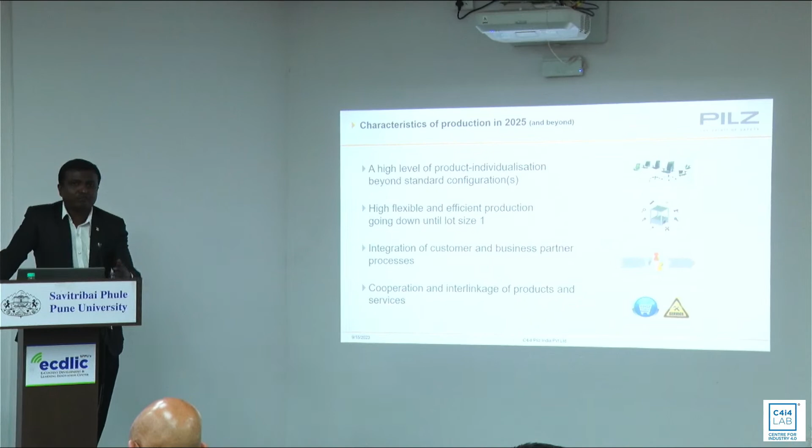If there is a failure or changes you need in one machine, you only need to configure the decentralized part, in a laser marking equipment, for example. And only that unit needs to be certified rather than going with complete system certification.

Of course, integration plays a very important role. So we are integrating not just machinery but our network and office systems also. For example, say a production-related system, ERP system, SAP. If that also wants to be integrated, and if you want to manufacture parts on a lot basis or a single part, then that has to be done in a decentralized way.

So in this case, a lot of tools and a lot of products will be required to be interlinked, and that has to be adopted and controlled in a coordinated manner, considering safety and security aspects as well. Just imagine you have plant machinery operating, 1,000 parts are being generated, and suddenly due to some cyber attack or cyber security related threat, you are not able to run your machine. Example, ransomware attacks.

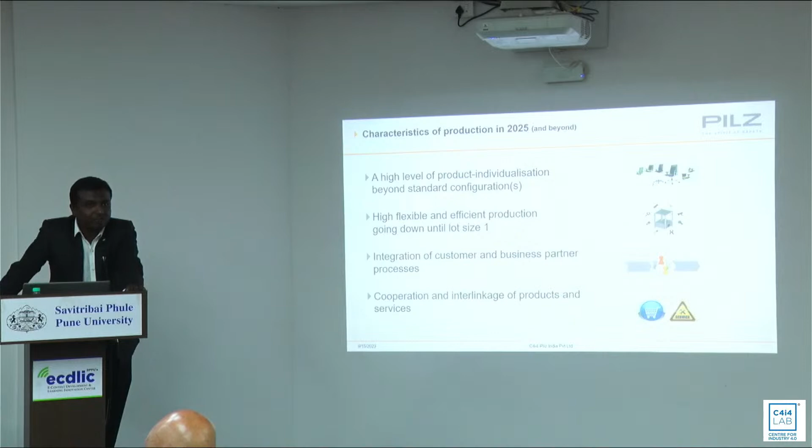Nowadays it is very common. You may have heard it many times in the news. If a ransomware attack happens, what happens? You are not able to run your equipment unless you pay some amount. It means virtually your production is at a standstill. And hence, considering all those threat aspects, when we are integrating things into the machinery like cloud technology, IIoT, industrial networking, security plays a very important role.

So in this case, the products which we are going to use can themselves generate a lot of information. For example, if some person wants to access the machine, the first thing you need to check is whether he is really an authorized person or not. In many machines you see auto mode, manual mode, setting mode, different types of operating modes. But do you know who is operating these modes? Are they really authorized to do this activity, or can any person access these operating modes of the machinery?

So in this case, authorization plays a very important role, and instead of conventional mode selection, you have to go with some standard or safety product wherein security is also guaranteed. It means the data of the person who has access to the machine is also captured by that product itself. Maybe the person's name or their authorization, but apart from this, security level, permission level, maybe some unique code like a hex code or RFID code, will make sure that the person is correct and authorized to carry out certain actions on the machine.

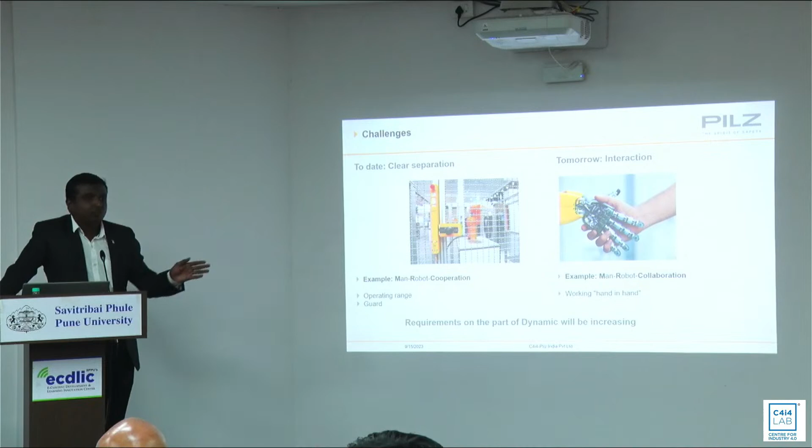So just as a concept, in a traditional way, we use guarding, interlocking switches to make sure that people are safe from unwanted or unauthorized access. Whereas in collaborative operation, man and machinery will work in the same area at the same time, and hence there is a requirement of risk analysis. Whenever there is a possibility of hazard or incident, we should do proper risk analysis.

So there is always a dedicated standard available. For the risk assessment, what is the standard? ISO 12100, specifically with respect to the machinery. This ISO 12100 standard talks about how you can do the analysis and estimation of different hazardous scenarios into the machinery. There are certain steps we need to follow - as a first step you need to identify limits of the machinery.

It may be user limits, specification limits, different energy sources which you connect into the machine - electric, pneumatic, hydraulic, chemical, water - different types of energy sources are there. That source itself can lead to an incident sometimes if they are not controlled in a safer way.

Then hazard identification. Simple - nowadays robots or AGVs are being used frequently in the plants. If a robot is there, what are the different types of hazards associated with robots? Simple - impact hazard. If you have access to the robot while it is in motion, impact is possible. Crushing hazard - clamping of tools or clamping of fingers due to the end effector. So all those hazards, whether mechanical, electrical, or control system, have to be analyzed properly.

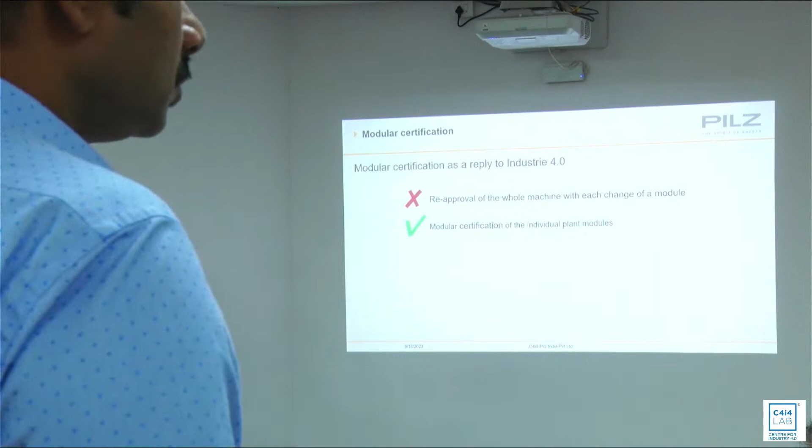So now, related to security, the standard IEC 62443, this is the series which is more common in use whenever cyber security related aspects need to be checked. There are multiple standards in this series, but IEC 62443-3-3 is the more visible standard globally. This is the standard which gives information about security level and foundation requirements.

There are 4 security levels, SL 1, 2, 3 and 4. There are again 7 foundation requirements for the networking aspect. Foundation requirement 1 is related to identification and authentication control—who is accessing the machinery or equipment. Foundation requirement 2 is related to use control—how, in a modular way, user control will be applicable.

Then the third requirement is system integrity. Fourth is data confidentiality, which is very important. Then fifth requirement is restricted data flow. Sixth is timely response to malfunction or events. And the 7th foundation requirement is related to resource availability.

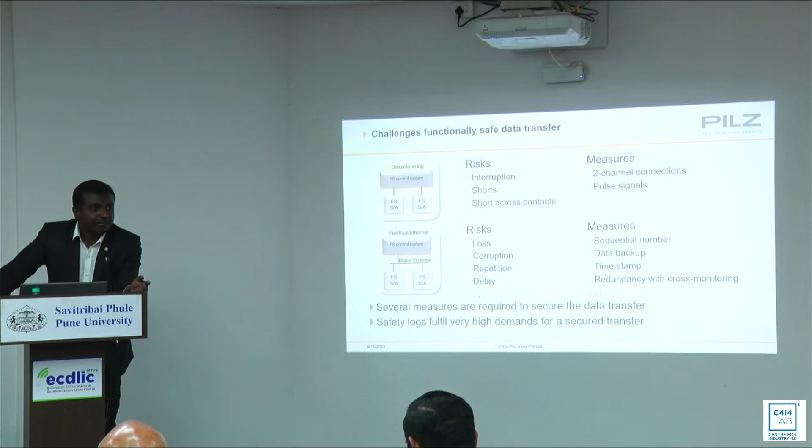But it will not allow us to compromise our network in any way. We have to maintain that security level even if there is a failure aspect. So if there is a corruption in the data or loss of data, by using certain protocols, those data breaches can be detected and certain actions can be taken. So in this case, multiple protocols may need to be used.

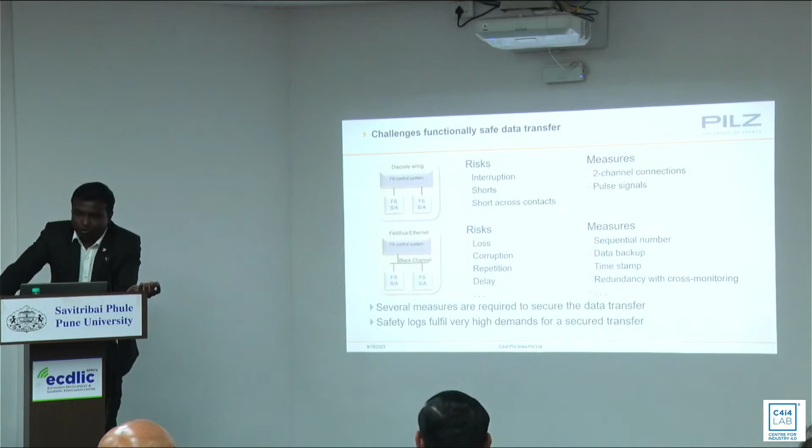As of now, most of the systems are fixed. There is a system, there is PLCs, there is SCADA, there is a PC terminal. But in tomorrow's Industry 4.0, typically you may need to use some AI algorithms, ML, cloud system. Whether it's AWS or Azure, data storage mostly will be done on the cloud, and based on this, access level will be given.

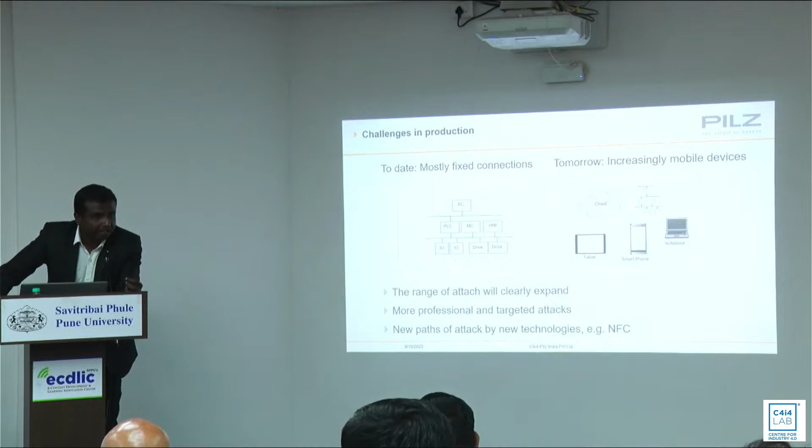So it is no longer a fixed connection. These are remote connected. You can have information just on the click of your buttons or fingers. And hence when we are implementing these solutions, please think of the standards compliance needed with respect to the networking. If you do the risk analysis or security level analysis of the network, there will be high possibility that there is no chance of any security related threat to your systems.

Now in this case, there are multiple levels: components at the factory level, network level, and all your communication or network related equipment at the factory level. So the interface with respect to all these levels has to be secured. It may be intranet, it may be internet, there may be different types of communication methodologies used within the plant or outside the plant. All that access control has to be secured by some mechanisms, and hence we have to make sure that whether it's a fixed installation or some dynamic situation with dynamic machineries, in all cases safety will be maintained.

Now these are the foundation requirements which we talk about. So we have to take care about data integrity, data confidentiality. In some countries it is already implemented and it is expected to be implemented in India as well. How the data will be managed, resource availability, identification and authentication control, IAC - that plays the most important role.

Nowadays some hardware or unique keys are being used in equipment to make sure that unauthorized access will be prevented. But as per Industry 4.0, it will not give enough data like who is accessing these keys, and hence you may need to use some RFID keys which give a lot of information about security level, permission level, who the person is, their hex code or some unique coding by which the person will be authenticated and known. So these are some foundation requirements over which networking security will rely.

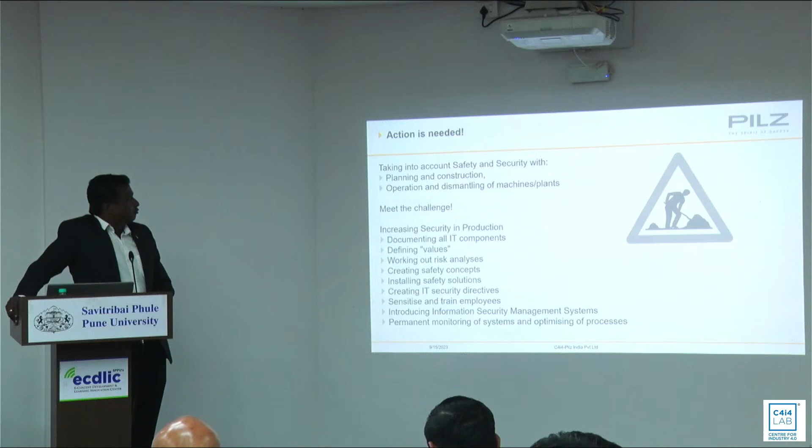So while taking into account safety and security, planning of networking plays an important role. Also, the type of equipment and devices used in the machinery and what type of connectivity they have play an important role. So in this case, there is a huge requirement to meet the security challenges: documentation related to all IT related components, risk analysis of all equipment, creating the IT infrastructure, creating IT security related directives. From that, your analysis will start. And then only with the help of trainings, actual implementation and learnings, you will be able to know what the actual risks in your system are.

So just as a summary, safety and security are two sides of the same coin. Safety plays an important role as well as security in machine automation. Based on the demands of the machinery, the solution can be complex, or sometimes an easier solution can also work. The best way to make sure that you have a system which is meeting the requirements of the standards or directives is to use the recommended IEC or ISO standards, so that you will also know that the compliance level for your equipment or network is achieved properly.

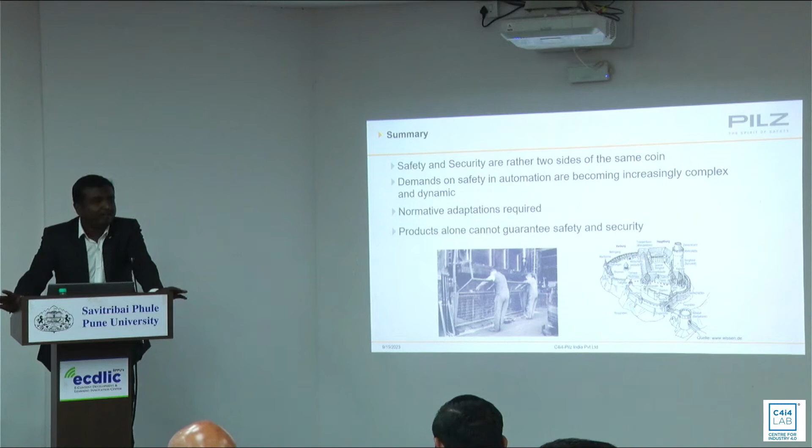With this, I will just play one small video which is a smart factory concept. This is one Industry 4.0 concept developed. So there is a machine available. It's a complete

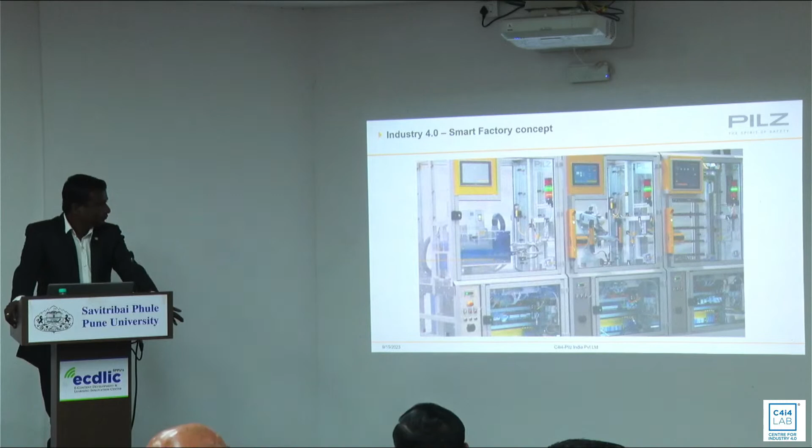Smart Factory from Pilz. Here, pens and business card cases are individually engraved. The Smart Factory is composed of 3 modules which are networked together and can operate independently of each other. Once the engraving data has been entered into the computer and sent to the Smart Factory, production in accordance with Industrie 4.0 begins. An RFID chip on the workpiece carrier contains all the data relevant for the process. So the robot in the second module knows whether it needs to remove a pen or a business card case.

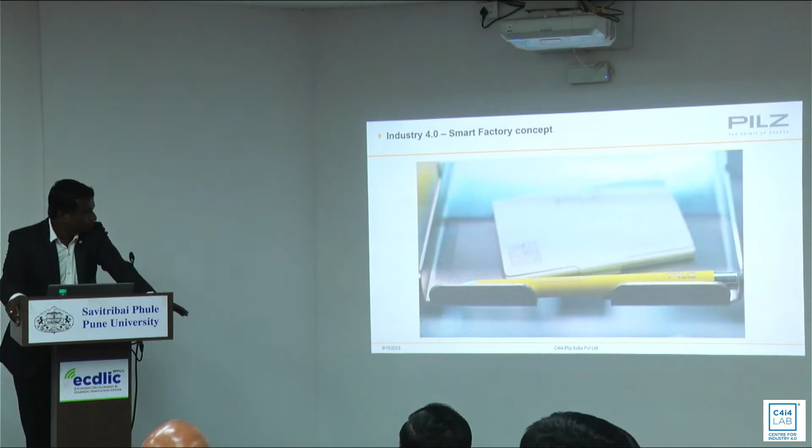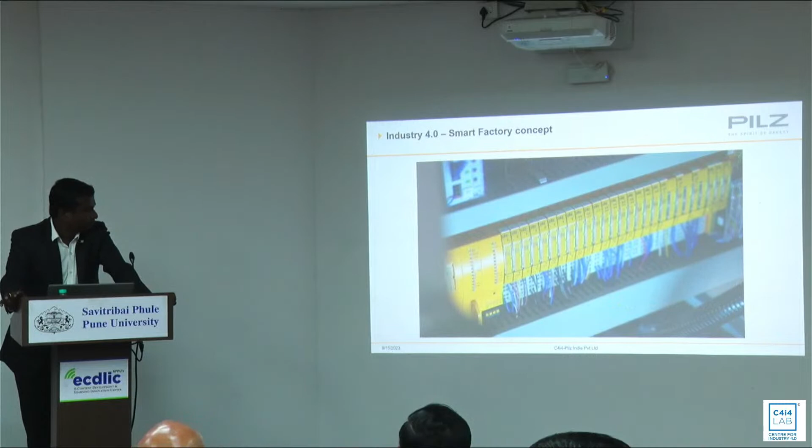The laser in the third module engraves the workpiece using the stored data. The result, individually engraved products at will. The Industry 4.0 compatible automation system PSS 4000 coordinates the sequence of all networked components, safety and automation, from engineering to visualization. If an error occurs, it's displayed immediately on the PMI via the web-based visualization software PASvisu and can

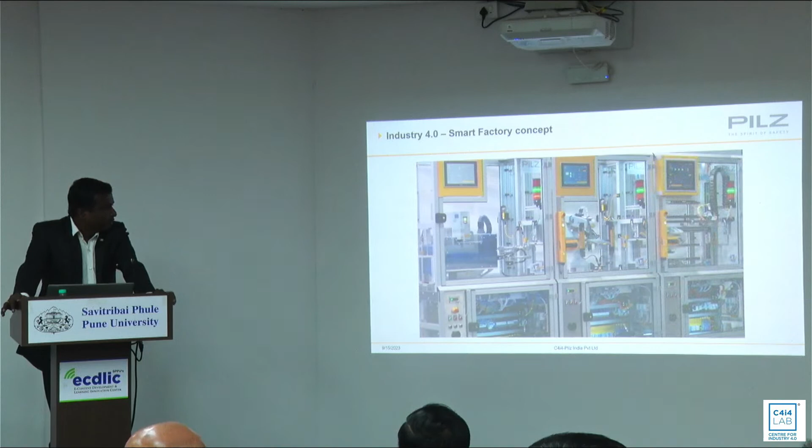be rectified. In addition to these products, this smart factory uses all automation products from Pilz, from the sensor and drive through to the controller. We'll be glad to use our expertise to help you work towards a smart factory with tailor-made automation solutions. We automate for the future, for Industrie 4.0.

So all these modules, 3 modules are there, all decentralized. Each can be disconnected easily, again reconfigured easily. And all the security related aspects are also covered while implementing this as a standalone solution.

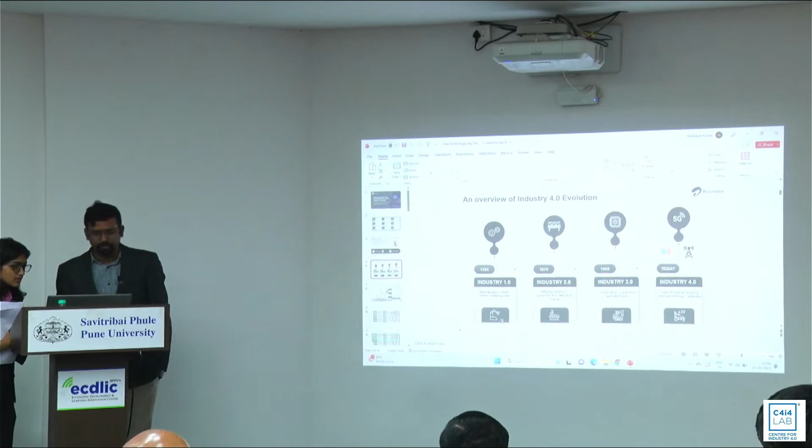Hi, good afternoon. I think you have seen this slide. If I remember, the industrial revolution was already covered, right, in the previous session. If it's covered, then I will skip it. This is shown in the previous slide. Okay, then let's move.

So in today's session, what I'm going to cover, and from the Airtel side, what we intend to do, okay? And I would like this session to be more interactive, because a lot of things would come up which you may be interested in, right? So these two pictures you can see there, right?

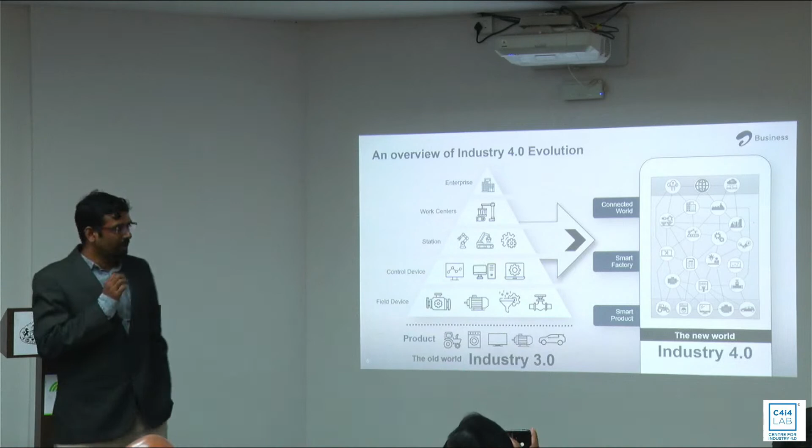Now, in the Industry 4.0 world, everything is connected. Sensor, controller, whatever device, application, everything is connected. And whenever everything is connected, it is being called smart, right? So here, whatever bottom layers are there generating data, then how all the data is being utilized, n number of things are coming up, right?

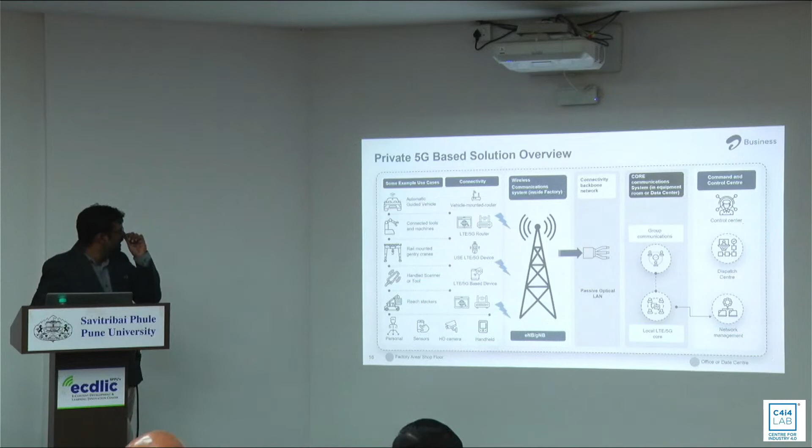Okay, so here is the private 5G based solution overview. There are different applications now targeting 5G. One is the automatic guided vehicle. This is taking place in production plants in a heavy way. Why? Because, for example, the Kirloskar Kagal plant has a warehouse where they manufacture big engines. For each engine, different components have to come from different warehouses, be picked up from different locations when the batch comes, and go to different assembly lines. Then these components are assembled together, and whole engines are manufactured.

Now in manual operation, the problem is finding where the part of the assembly is kept, picking that part, and then reaching a different location. It's a manual effort. Now some digitalization will be taken care of for sure. This can be handled by an automated guided vehicle. This vehicle will automatically pick up the part, know where and what time it has to reach. Now for this automated guided vehicle, what do you need? Communication, and that can be enabled with 5G.

So you can see the applications which are coming up and how the game is going to change in the plant. A lot of new things will come. That's why we are now talking about connected tools, and rail mounted gantry cranes. So different tools and different applications are there. It has 5G connectivity, with the wireless network, the RAN, having a backbone with optical fiber, and that's how it works, right?

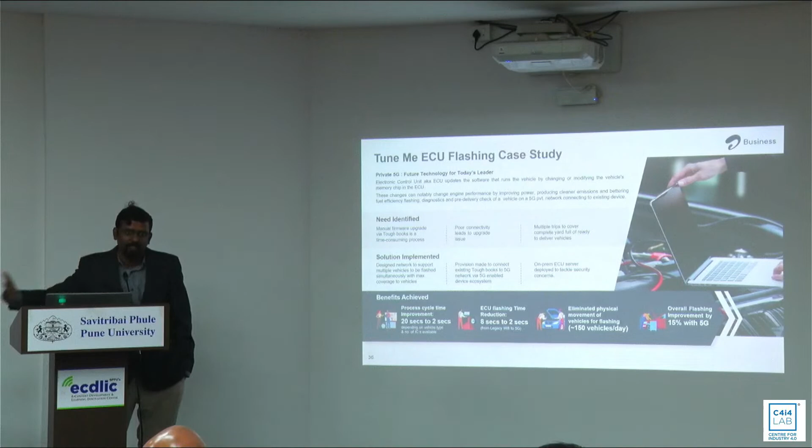This particular 5G was in the Mumbai office. From there, the data is routed to the plant area. The plant is in Pune, the data comes from Mumbai, the ECU flash happened, and we got lower latency. So if you see the result, from 20 seconds to 2 seconds overall time we have saved. Flashing time reduction also happened, and it was very successful, where we have shown the capability of 5G: when high bandwidth is given to you, what you can do, right?

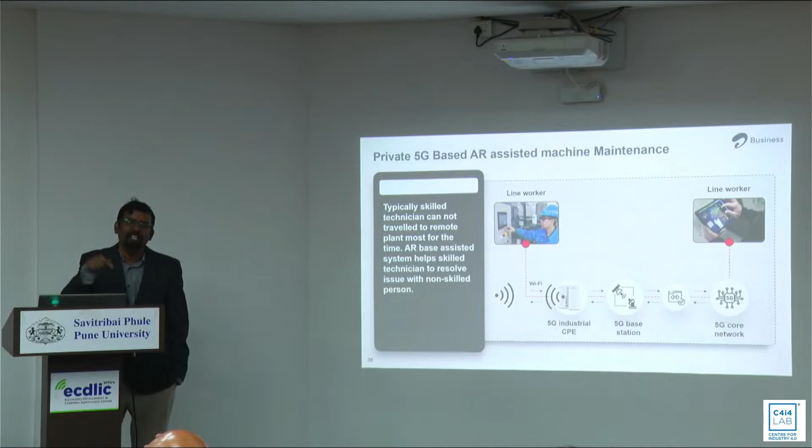The second use case is more among the use cases people are talking about. I'm just showing how it will help. If you see any plant, it's always in a remote area, because the land cost is less, and there are a number of reasons why it has to be remote. Now, in those kinds of plants, if a problem comes, sending the site engineer from the company is a big pain. They won't come immediately, number one. If they are coming, logistics are a problem and all this.

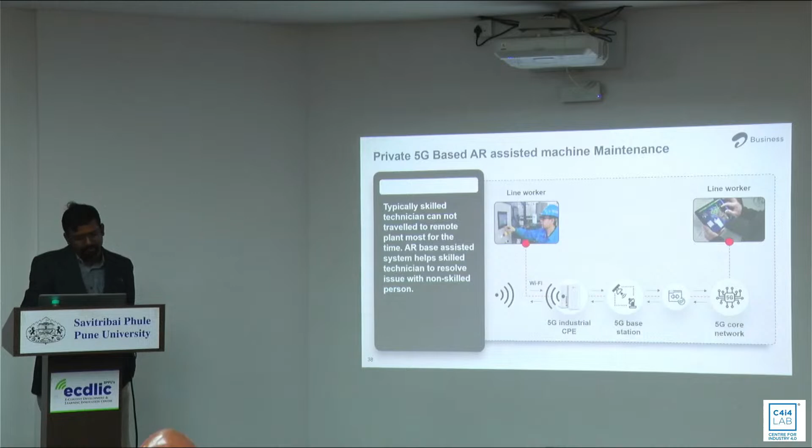So this is where one use case is AR-assisted maintenance, where in the plant an operator goes there, and the skilled person is seeing the live information. He will instruct them, do this thing, and the problem is solved. No need to waste time traveling. Why was it possible? Because in real time he is able to tell when and what needs to be done, right? So this is one example of the use case where AR-assisted maintenance can be done.

The other use case is also very interesting. It is not in India, but in Europe people have already done this kind of thing: machine vision AI for maintenance inspection. So there is a plant where you have pipeline leakage, abnormal noise, and different kinds of symptoms come, surface temperature is increasing, and all these symptoms come.

Then there's the operation side of digital transformation for mining, which is also a very important area where 5G is required. In open pit mining, when fields are open, a lot of vehicle movement is required, but communication isn't available because it's a very remote place. 5G helps coordinate the vehicles and everything else.

One of the things we've done is the connected ambulance application, where the ambulance has 5G connectivity. The patient is in the ambulance connected to the private 5G network, and while traveling, doctors tell the operator what needs to be done. So the patient's life is kept safe even coming from a remote place, because everything is monitored live.

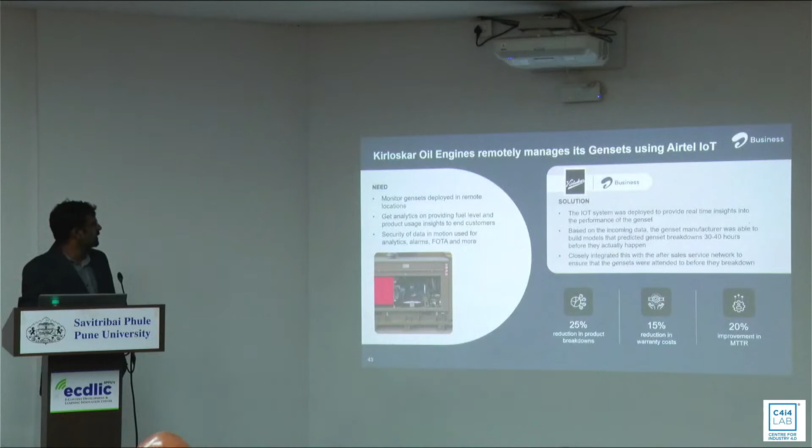Our IoT devices basically provide a solution which monitors the generator with real diagnostics in real time, covering fuel and maintenance requirements. This solution uses Airtel IoT technology, and based on the incoming real-time data, we're able to predict 30 to 40 hours in advance when maintenance is required. If you're able to predict failure in the plant, you're going to save a lot.

Some of the things are there. I think I have zero minutes left, so I have to stick to time. Thanks a lot for listening to the presentation. Thank you.

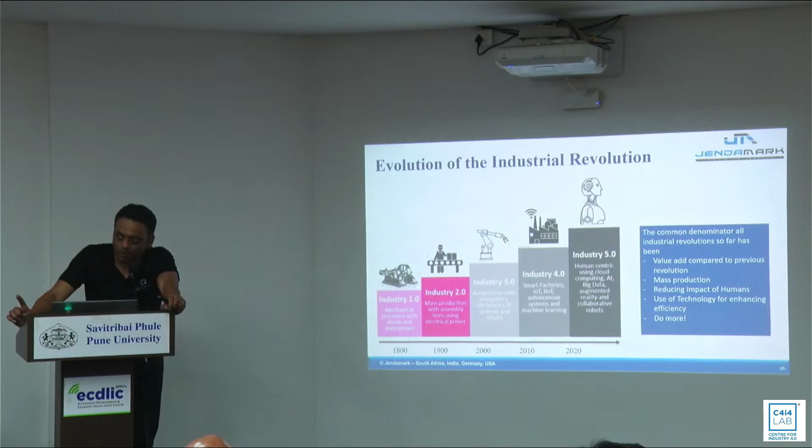I give an example always of e-commerce, Amazon. Earlier, if I had to buy a shirt, I would go to a shop, select the kind of shirt I want, try it, buy it and then use it. I would buy one shirt. Now I buy 4 online. 4 come to my house, convenience. Maybe I need only 1, but because now I've got 2, I keep 2. Did I need 2? But because somebody delivers 4 to my house, I'm happy to have more and more options delivered to me. But do I really need more than 1? Never. Most of the time, we have always ordered stuff which we don't need. But then who will go to the hassle, because they make the process of return and credit into your account quite complicated, to make sure you don't return only.

So that is where I feel this greed of wanting to do more and more had to stop at some point, which COVID made a break to everyone, and whatever happened during COVID made people think and realize maybe we should stop and think really what matters. That's where the 5th industrial revolution comes in, which is why I said that I4 maybe should change to something else, where we said it should be human-centric, right?

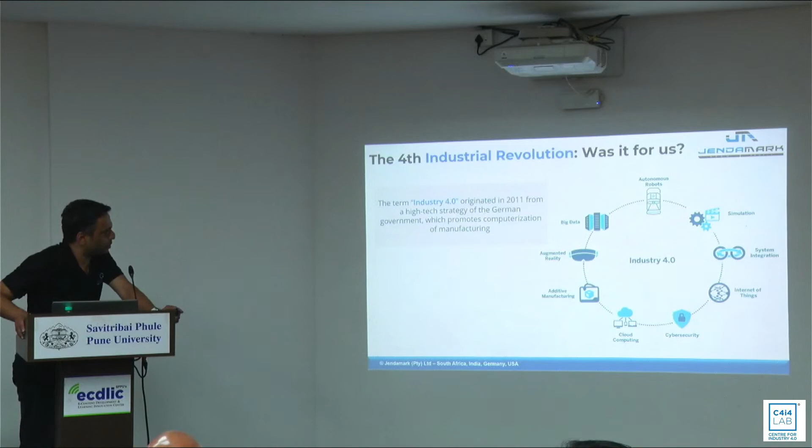Now I'll go to some basic questions again. Is the 4th industrial revolution, again my question was, it for us? Well, I'm already using the term 'was', because in my head, fourth industrial revolution is over. We should think of the fifth one already.

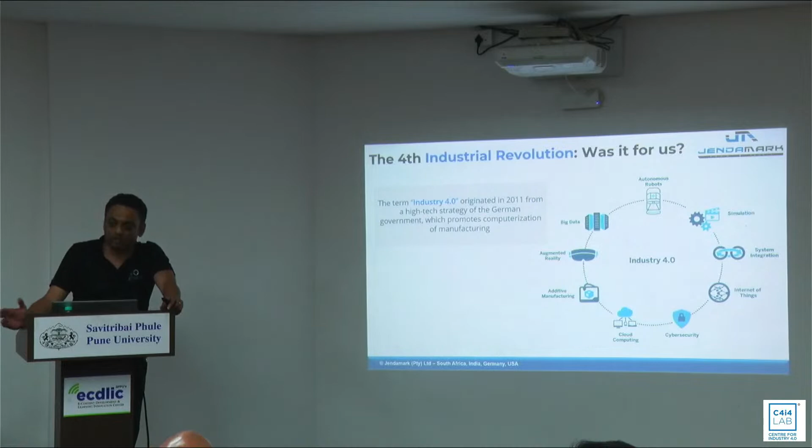So this Industry 4.0 term came in 2011 in Germany. Many of you may know already that Industry 4.0 did not start in India, did not start in US. It was specifically in Germany when the German census, which is the report of their population and age and everything, came out. That's when the German government called all the big companies like ThyssenKrupp, my colleagues from here, and said, this is a problem we have got in our country, in our economy right now. There were a lot of problems which were highlighted, and I'll show some of those, like aging population, less resources to do what they wanted to do, the IQ level in general compared to before, and now immigrants coming in. There were a lot of problems which German economy had, which came out in the 2010 census.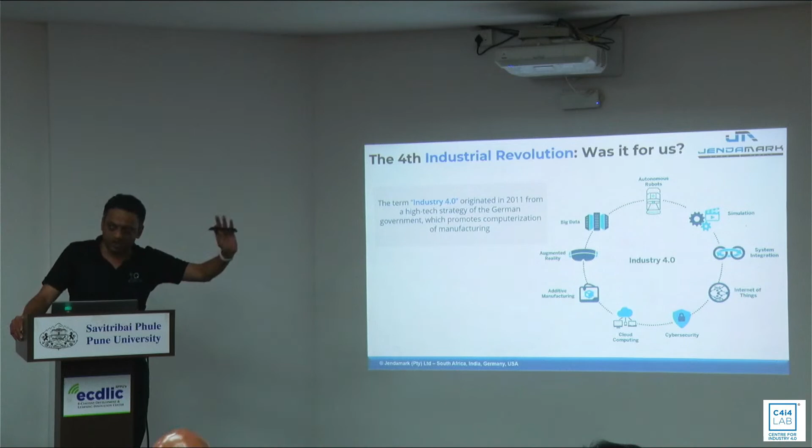So they called the big German companies like Siemens, T-Systems, Bosch, and told them, this is what we are having, please work together to find a solution, because we would like to continue what we all know famously as German engineering, right? They came up with these solutions: autonomous robots, simulation, system integration, Internet of Things, cyber security, cloud computing, additive manufacturing, AR, big data. This is what was the outcome, which is also documented, and they hired BCG, that's Boston Consulting Group, who did a complete report for the German government under the guidance of these companies. This is what Germany must do, Europe must do, to fix its problem.

Now, I would like to show the next slide. Are these appropriate for us? Here are some statistics.

Germany's population is 8.3 crores. India's is 140 crores, Maharashtra is 12.3 crores. Area: Germany is 3,57,000 square kilometers, India is 10 times that. Maharashtra is at par with Germany, just Maharashtra. Languages: Germany has 5 languages, 95% of Germans speak one language. India has 780 officially documented languages, 1,000 plus dialects.

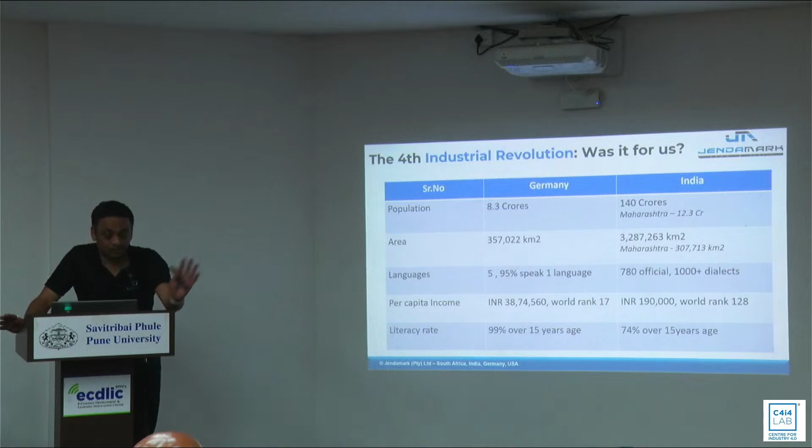This is the good part, right? Now see the bad part. The bad part is per capita income. Per capita, for some of the students, it is the average income of an individual in a country. The average income of an individual in Germany is approximately 38,74,000. It is world rank number 17.

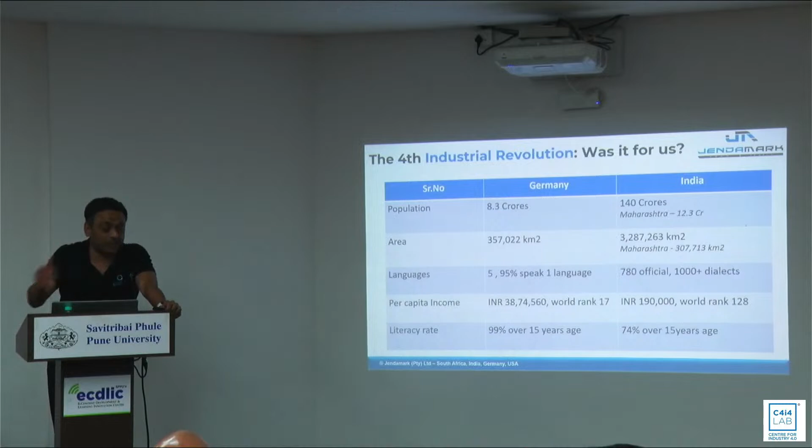India's average income is 1,90,000. We are at 128th rank. How can we then think of literacy? Look at the literacy rate: 99% above age 15. So 99% of Germans are literate above the age of 15.

Why I chose the sentence 'above age of 15' is because everyone tells me, no, in olden times it was like that. No, not in olden times. Even today, India's literacy is only 74%, guys. That's a reality. We live in a city covered by maybe only intelligent people, but if you go 3 hours outside Pune city, you will come across literacy rates which are unbelievable.

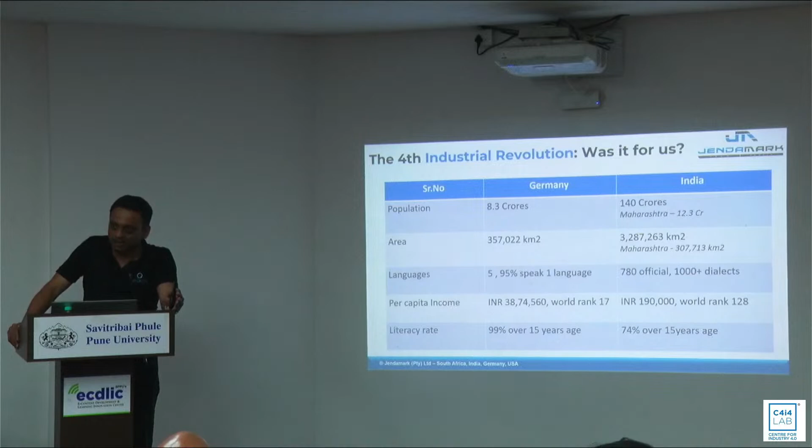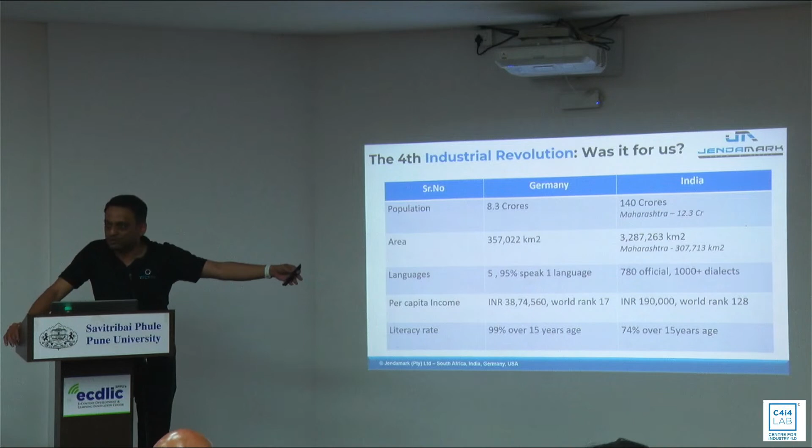So just look at these things and tell me, really, is the problem statement which the German census had and what we see today, is it the same? If it is not the same, why are we adopting the solution which was given by the Germans for their companies? Think of it. Look at the stark difference, it's not even close. It's not even like we are nearby to the German situation. We are way ahead and way far away from the actual reality, where we are today and where Europe is.

This is our real problem. Our real problem is a huge population, and this population is not even going to go lower in the next 2 decades. We are still going to keep increasing our population for the next 2 decades. We don't have a healthcare system like Europe. Our healthcare system is not there, it's individual health driven. Now, of course, there are some efforts being done by the government to bring at least some people under the healthcare.

Crime and corruption are obviously linked to the per capita income. Whether we like it or not, a significant portion of our life goes into dealing with crime and corruption. Our literacy, I already spoke about, 74% only above age of 15. Languages we spoke about. So these are our problems which affect the industry.

I forgot to mention one thing, sorry, it's contract labor. I don't know if the students know, I'm sure the men in the front know. India, the dark reality of the Indian manufacturing sector is, we don't make employees permanent. Tatas, Mahindras, take any name, they will not make employees permanent. They will fire every employee after 8 months. That's the truth. I understand the reason now, because they want to avoid union formation and all of that. Fine, but the reality is, every 8 months you will send 80% of your staff out and bring in new 80%.

Nobody wants to talk about this because, let's not talk about this because this is the Tatas and the Mahindras. But the reality is that, right? I started my career in Tata Motors, guys, so I can tell you it's true because I worked for 5 years in Tata Motors. So this is what happens in reality. Whether we like it or accept it, this is the truth.

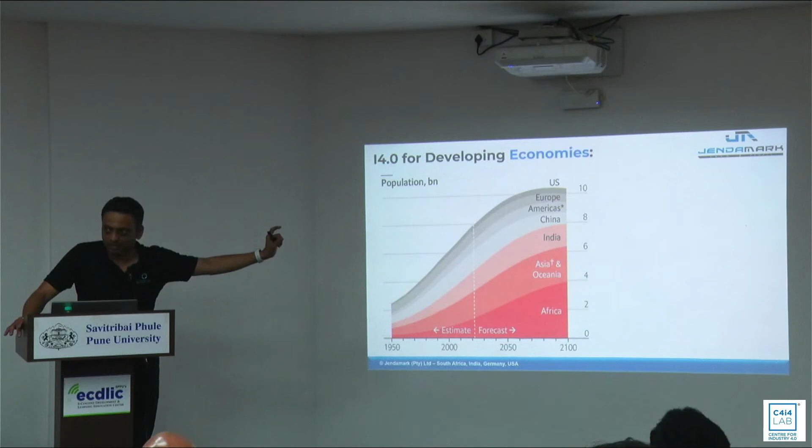Clear so far? Now you will see 80% of the population is residing in developing countries, which have the problems which India has. 20% reside in developed countries, for which Industry 4.0 is clearly the right solution. Autonomous robots, 3D printing, no problem. So the strategy there, and because we also cater to European clients, I'm not against Europe or European clients, automation is using technology to do more with less people. That is where automation should play a prevalent role.

And like I said, we build machines. My first job is to build machines. The second job which we have is digitization, which is using technology to do more with more people. We cannot have less people. It's beyond our control to have less people now. So we have to digitize so we can do more with more.

And that's the only way forward for India, not to do more with less, because I can't have a situation where I put 150 robots instead of 250 people and have those 250 people unemployed. What to do with them? How do we solve that problem? We may think it is not our problem, but trust me, when you think of what happens when you don't have money, hunger, food, crime, corruption, it will become your problem, whether we like it or not. We can't live in a castle which is protected forever, right? So we have to think really, can we do more with more? And that is what is possible through digitalization.

So in the Indian context, what I mentioned is why smart manufacturing has not really picked up. The reason is because everyone tried to implement Industry 4.0, which is an expensive system. And I have intentionally put some solutions of my own outside for display, a collaborative robot. It costs 21 lakh rupees, the one on display outside, and if you add the safe skin feature, it's 4 lakhs, so it's 25 lakh rupees for a collaborative robot. The minimum salary as per the government is 17,000 rupees. Now think of how many months you can pay an employee with 25 lakh rupees.

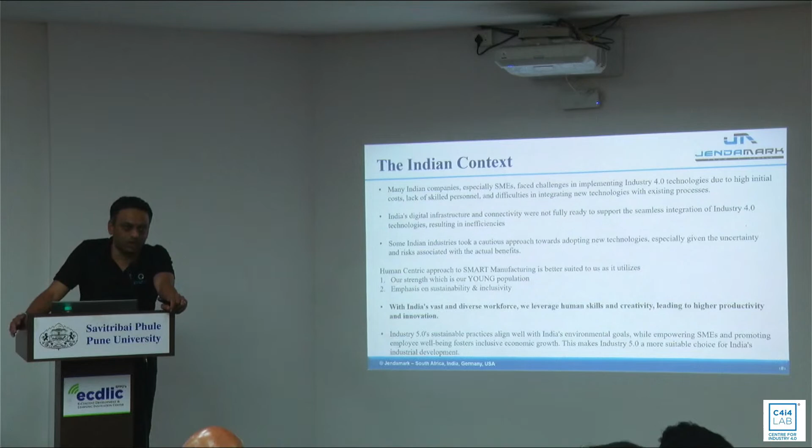India burns fuel, and that's a stark issue with EVs in India. You burn coal and you charge your EVs. Does it make sense? We burn so much, we are promoting EVs, but what do we do? We are burning more coal now to charge our EVs. It's only solving the problem of the people who can afford EVs, because they feel nice now: oh, I am a clean fuel guy because I am driving an electric car, I am using electricity. But somebody in Chandrapur is burning more coal.

I don't know if people know Chandrapur, it's a district, that's where the real problem is. You go over there, guys, you can't see the sky. You can't see anything on top. That's the reality. And it has happened in the last 3-4 years, by the way. It's not like it's been happening since the beginning. And that's the Indian context anyway.

So we should be able to do something with our strength, which is our young population. Our young population, and again I'll tell you one of the statistics which came up in my Odin education discussion, is India has 18 crore students or children in villages. Out of a total population of 140 crores, we have got 24 crore children under age 18. Russia's population is less than that.

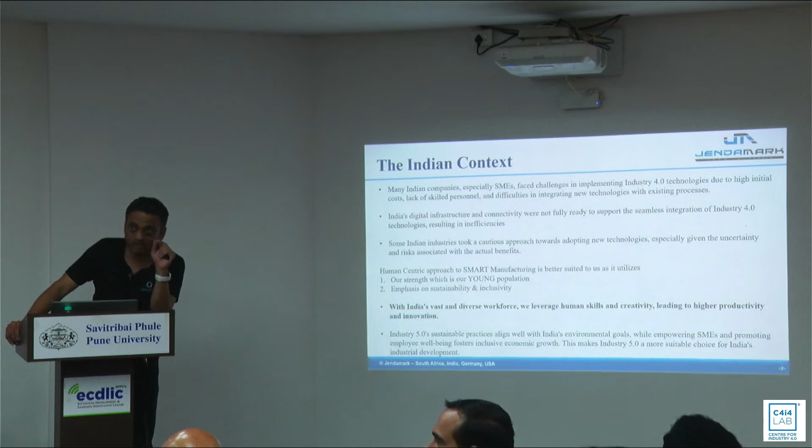Just think of it, that we have got more children under age 18 than the whole of Russia's population. Out of 24 crores, 18 crores are in villages. That's our strength. And this 5 trillion economy which we all talk about, it won't come into effect because the reality is, and for all the students over here, it's a very important statistic to understand: a guy in a village, after passing 12th standard,

49% of youth are unemployed. And you can go and check, it's in government statistics. 49% of India's youth are unemployed after passing 12th. How many people can afford engineering nowadays? How many people can afford to be a graduate every time? So what do we do about making those 49% at least employable?

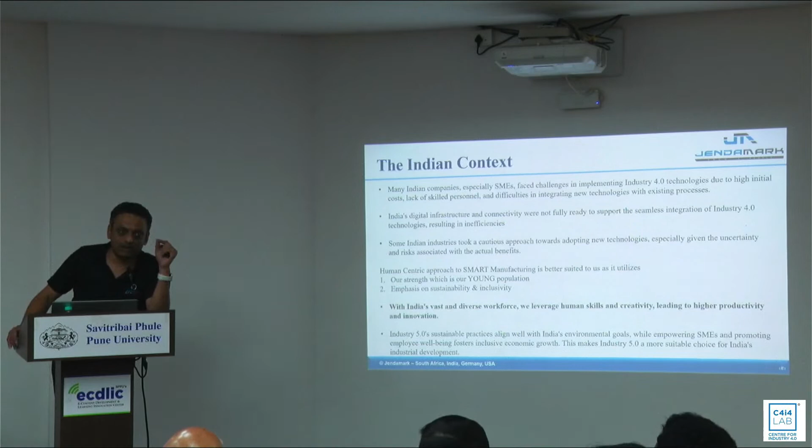Is adding more automation and more machines and more sensors the solution? Or making them more efficient is the solution, right? How do we make sure? That's why I've put some nice demos, and I would request all of you guys to make an attempt there, where we have put solutions where anyone with zero experience, zero skill, zero idea of what a battery pack assembly is, can still make a battery pack.

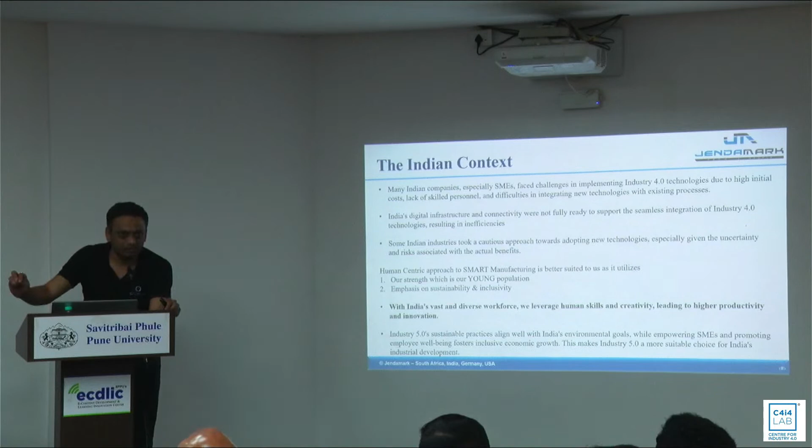Which means you can literally go on the road, pick a person who is illiterate, bring him on the line with our solutions and ask him to do something wrong. He can't do something wrong. That's how powerful the software solutions we have are. And that's solving the problem which India has. I'm not making the line more efficient. I'm not making the machines more efficient. Because already I make machines which are 95% efficient.

For all the industry guys who are here, you can tell me one guy who is even 75% efficient in factories. Everyone is on contract. Half the time they'll go 10 minutes early for lunch, come half an hour after lunch. You can't do anything. That's the reality, right?

Then again, this human-centric approach is also what the government is promoting. If you see Independence Day, there was a stark mention that we should be doing development which is human-centric and humane. That's from our Prime Minister. Just last week, he repeated the entire thing again in the G20 summit; the first header is we must fulfill responsibilities with a human-centric approach.

So if the government, which is funding C4I4, is saying we must do human-centric, and I feel, like I showed you, Industry 4.0 is not human-centric, it is machine-centric. Should we not change C4I4 to something else? It's a government initiative, right? How is C4I4 then a relevant topic? It should be C4SM. Center for Smart Manufacturing, right?

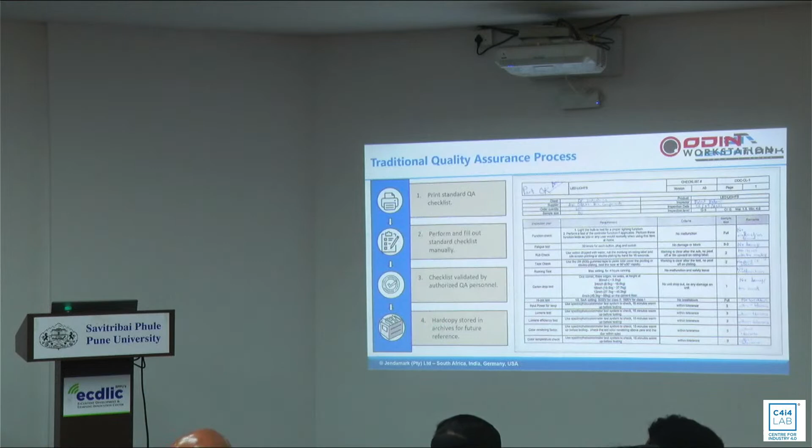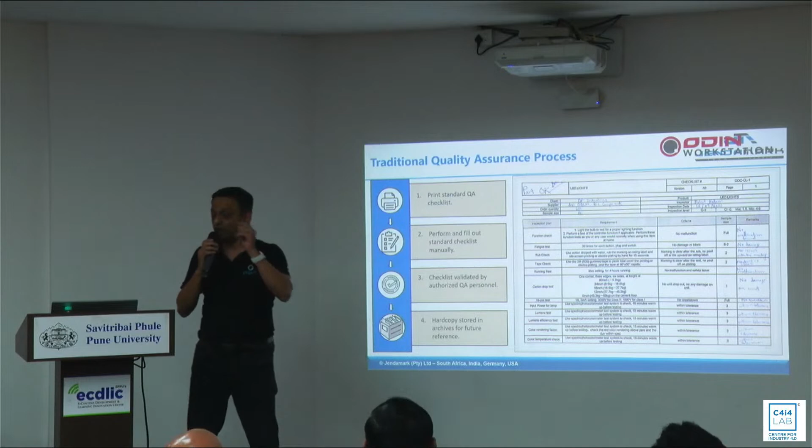No, it's not image processing. We are definitely checking these spots. So one of my other favorite examples is this one, end of the line, again how we as management pass the responsibility to our last guy. The last guy in any factory before dispatch gets a printout and is supposed to check the product and tick mark everywhere and make some comments and sign and say product is good for display. Oh, sorry, product is good for dispatch.

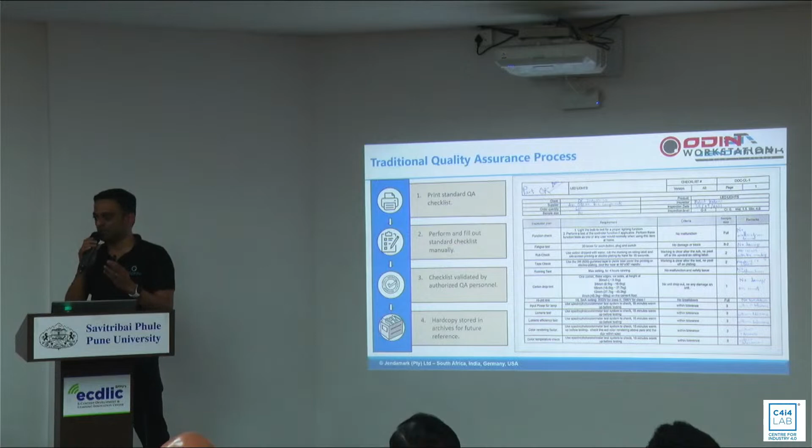Never have we thought, has he really checked something? This is again an eye wash for years and decades. Everyone follows this. And there is a signature by somebody, so and so guy did these checks, no issues, dispatch the part. We give him 45 seconds to 1 minute to check everything with no evidence whether he has done something or not. And again, it depends on how good he feels today. Yeah, they will fill everything with tick marks in the lunch break, and when the part comes, they sign it. You are absolutely correct. And variant wise is never there.

If I'm making a variant A and a variant B or C or D, all have the same checklist. They will never have a variant-specific checklist. So we tried to change this by bringing something called Odin Ensure, where we gave them a simple industrial phone where we show them what they have to do. They have to actually take a picture. As per evidence, the time taken by making a tick mark and taking a photo is exactly the same. It doesn't make any difference.

But now he only sees, for that variant, that particular step. He also sees a picture of what he has to take a photo of, because sometimes you don't understand. As a new operator, you may not understand where should I go and take, or what picture, right? Was that English description? Guys, tell me honestly, if I look at this, where was it? There was something very interesting: use spectrophotocolorimeter test system to check.

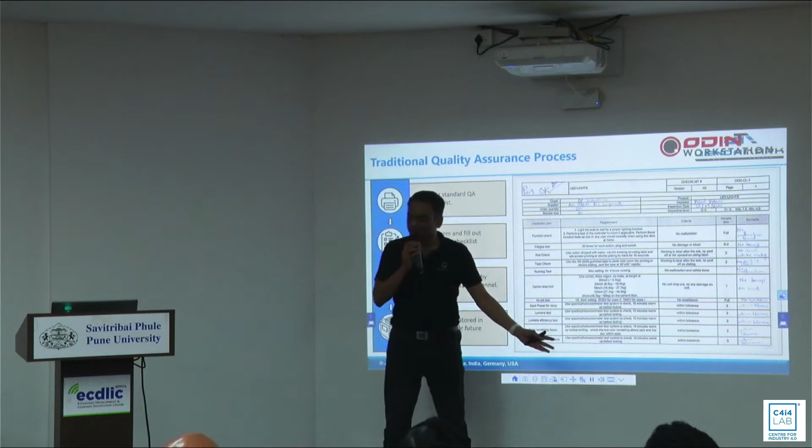Do you think that guy who's standing there knows what this is? He has no clue. What has he written? Okay within tolerance. Even I didn't know what this spectrophotocolorimeter test system is. But okay within tolerance. God knows what that means, right?

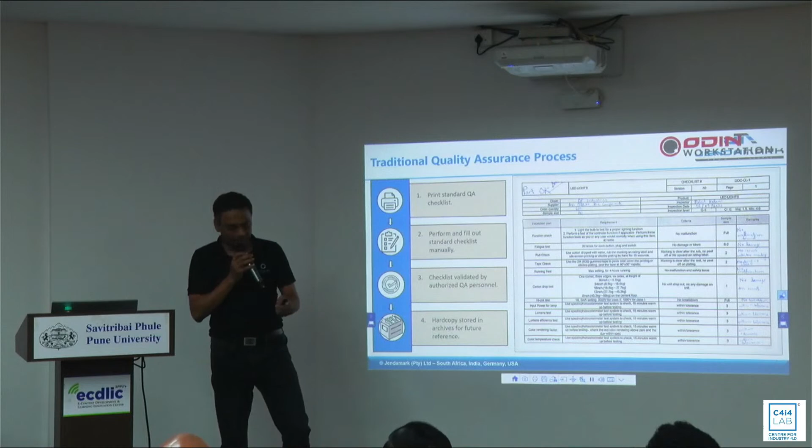But here, again, the language can be changed, there's a photo, take a photo, and there is a very nice feature called raise alert. Because I can raise an alert immediately and call my supervisor. So there is a problem here, I don't know what to do because I am not authorized to decide or dispatch. So I can just press a button and say alert raised. Somebody please come here and tell me what I should do with this.

At least the people who sign those nice SOPs will get the information. They'll come from their offices and see what is really happening on the line, and not just count at the end of the day how many OK reports came. I don't want to go into more details, but there are such nice solutions which we have. Like I said, the whole focus is, even like a very nice solution, behavioral change.

How do you carry out a behavioral change on an assembly line? Because operators make and decide the process. They decide the production output. Isn't their mindset and their behavior like oiling a machine to ensure it runs smoothly? How do you oil the head of a person to make sure he works properly, right?

And that's a software where we actually use psychological analysis to understand how he is feeling. Does he have any depression, anxiety issues? Is he always angry in the morning, happy in the evening? Those kinds of things will help us in self-improvement. There are psychometric tests, plus there is gamification. Everyone likes to be online. He has to answer because he has screens.

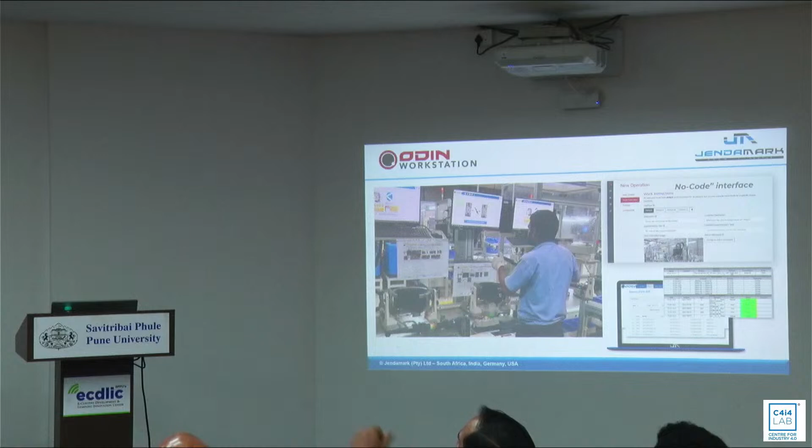They must change, right? No, I know, I agree. I agree. Well, then barcode can probably be changed to a serial number. We can think of barcode to a serial number. Maybe they can write down a serial number: okay, 1121001 is my unique serial number. I mean, there are ways. I have come across, sir, that majority of the times only intent is required. I honestly feel that if the companies have intent, they will come up with unique solutions.

It's just the amount of internet, the amount of social media we use in our daily lives, and I think Mr. Kilosar was absolutely spot on in the morning. We are so comfortable giving barcodes, scanning barcodes, and I don't understand when companies talk about security. AWS is unsafe? Your entire banking is on AWS right now. You are scanning a barcode at a thela over there and paying him money from your Google Pay, which exposes your entire banking to him, but you are worried about keeping production data on AWS. I don't understand that mindset. It's just a mindset thing, right?

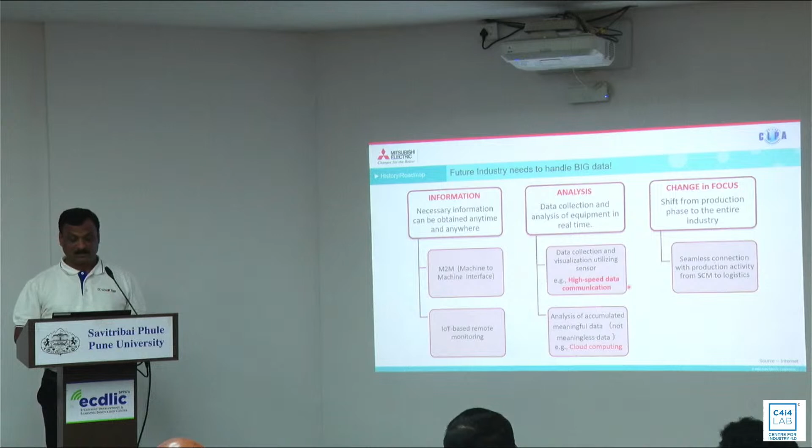Then there is a change in focus, shifting from the production phase to the entire industry. So the expectation from industrial networks is real-time performance: a fast network, large data handling capacity, and sufficient bandwidth for control data as well as message data.

Networks also need to be highly reliable, flexible to integrate seamlessly with upper layer and lower layer networks, effectively deal with the harsh environment because there is a lot of collision when using Ethernet - data collision or factory noise - and need simple, easy diagnostics of the network.

Next is network openness.

In industry, there are two types of network: the open network and the private network. In the private network, the manufacturer has its own understanding and uses its own protocol, so it is not open to everybody. He will develop products like PLC, IO card, and they are on network, and that is private network.

But nowadays the concept is of open network. The protocol is shared among different users or different manufacturers, and they build their devices like modular IO on different networks. So anybody can use anybody's modular IO. That is the concept nowadays, called the open network.

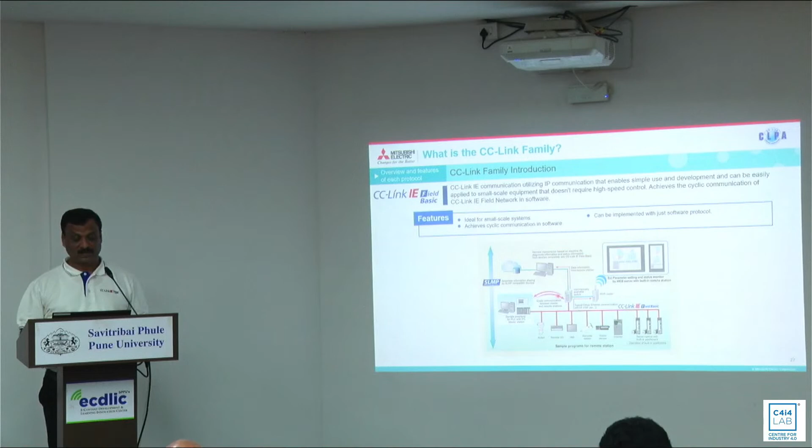The next is the CC-Link IE Field. As I discussed, field devices are at level 0, or the field level, where level devices connect in this network. We can control servo systems, robots, and capture data from them. This is designed as a 1 Gbps network, mainly used for machine-level automation. There are a lot of devices on this 1 Gbps network, like servo and robot, and we can control the machine using this CC-Link IE Field.

Next is the CC-Link IE TSN. Some features of CC-Link IE TSN include accurate time stamping information and advanced analysis, network integration, and utilization of wireless network and 5G. Nowadays 5G communication is popular as it has good bandwidth, so we can use it in industry to connect different devices. There is also the capability of connection between OT and IT. These are some features of CC-Link IE TSN.

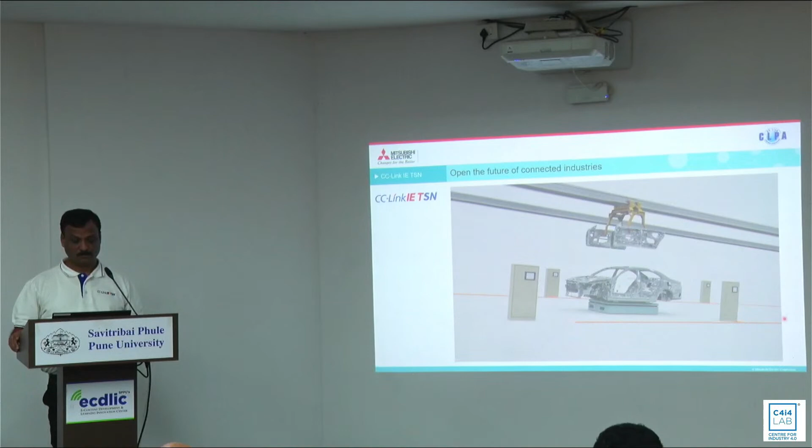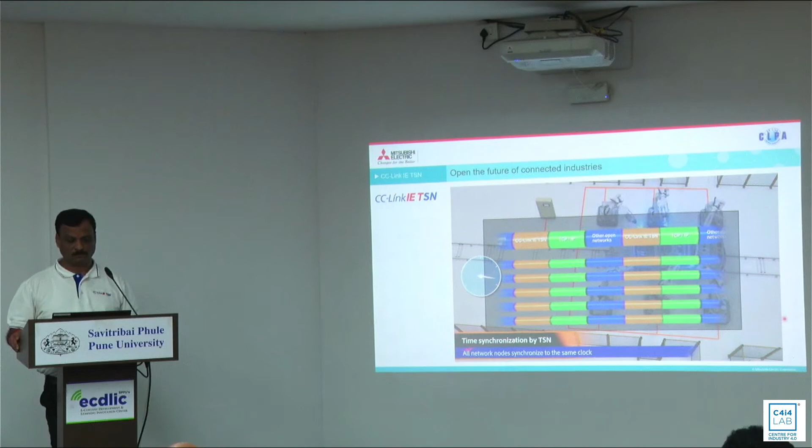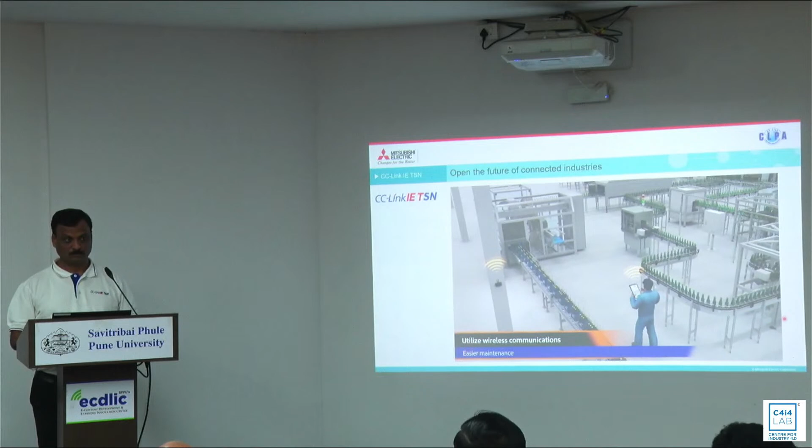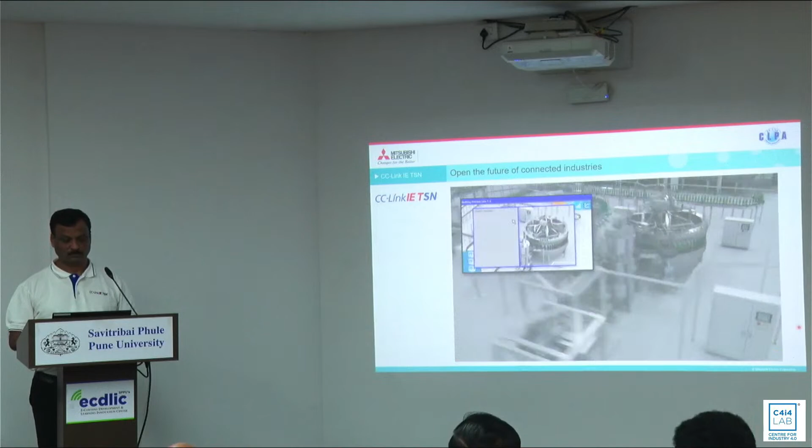So this is some highlighted points of the TSN. Now I will discuss in detail the integration of OT and IT.

Currently we are using different types of cables or infrastructure for IO communication, TCP communication, and other communication. But by using TSN, we can use a single network type, so all networks coexist on the single network. This makes it very easy to integrate information technology and operational technology.

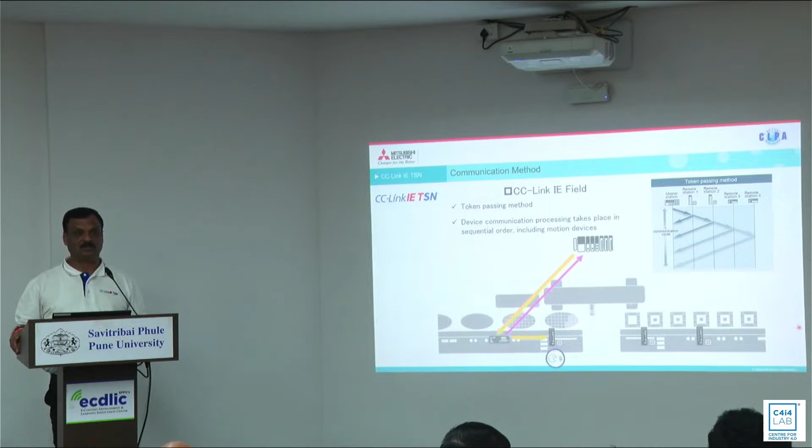Traditionally, the motion controller and IO controller have their own networks, but by using CC-Link with TSN, all of them coexist on the same network. Normally, communication takes place using a token pass method or consumer-producer kind of approach to exchange data, which takes a lot of time. But with TSN, all devices send and receive at the same time with time stamping, which reduces the total cycle time, so we can capture big data from the sensor level.

There is one more video showing the performance of the CC-Link IE TSN network.

Hi, I'm Tim Hyder from Mitsubishi Electric, product marketing manager for solutions and networking. I'm here today with a brand new demonstration to show off our CC-Link IE TSN network. CC-Link IE TSN is a protocol that runs on TSN technology, or time-sensitive networking. This is a technology we're very excited about, and hopefully in this demo we'll be able to demonstrate that for you. On the left side here, we have the master PLC.

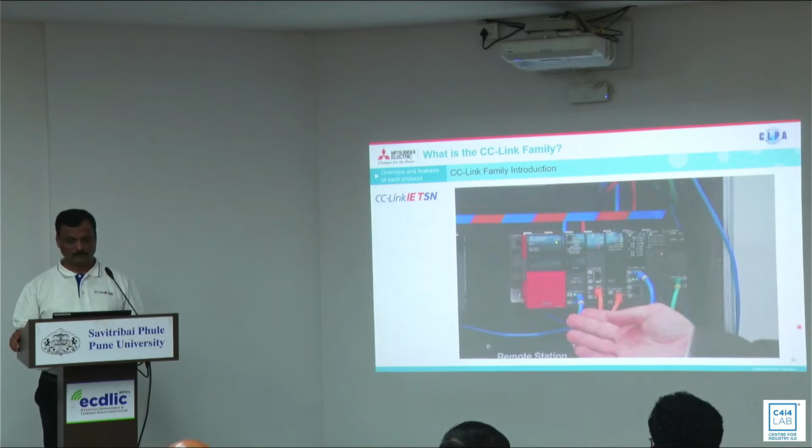The master PLC has multiple different networks: green for Ethernet IP, blue for standard Ethernet, and orange for CC-Link IE TSN. All of that network is passed up to a CC-Link IE TSN Ethernet switch, which is connected over to a remote station that also has a PLC. This simulates two different systems, a master system and a remote system, each with all the networks: blue for Ethernet, orange for IE TSN, and green for Ethernet IP. What the demo will do is have the master station spin a disc.

This is a 6-inch vinyl disc with a white dot for a mark sensor. This mark detection sensor will trigger a high-speed input module, which will then go to a high-speed output module and flash a bank of LEDs, similar to tuning a timing belt in an automobile. The goal is to spin this disc and flash the LEDs so we can clearly see the TSN logo. We'll take the speed and position of this disc and pass it through the network using CC-Link IE TSN over to the remote station, so both discs will be at the same speed and same position every single time.

What we're going to vary is the LED strobe. So on the left side will be TSN and that won't change, but on the right side we'll change to Ethernet and EtherNet/IP and we'll see what that looks like. Let's begin. I'm going to turn the demonstration on and we're going to start out in CC-Link IE TSN mode. And as you can see, we can clearly see both TSN logos and they're identical.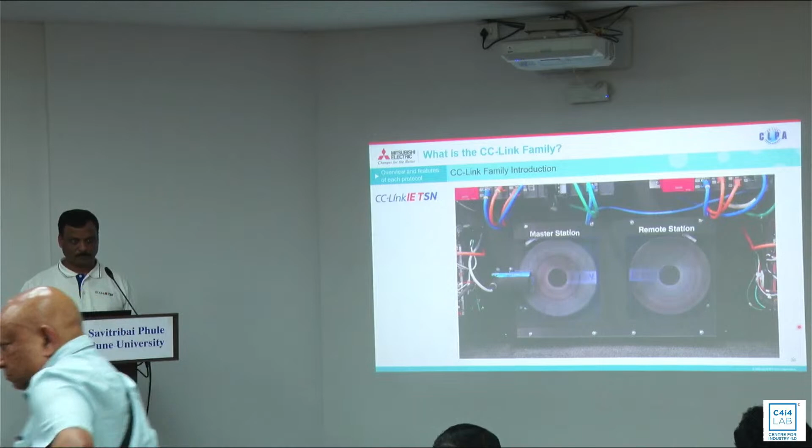And that's the benefit of a deterministic network. So CC-Link IE TSN is deterministic. We have other cyclic based networks like EtherNet/IP. So let me change to EtherNet/IP. Now it's close, but it's about 20 degrees off, 25 degrees off. And that's off because it's a 4 millisecond network and there's a little bit of time delay. It's not deterministic, so we can't guarantee its location.

We could also send the strobe signal with Ethernet, and now with Ethernet it's even more delayed, and that's just general Ethernet. When we send a packet out, we don't know when it's going to arrive. So again, that's the difference between just Ethernet, a cyclic Ethernet network, or a deterministic network. So now that you've seen what determinism is, this is the deterministic network we can use in the industry.

So now I will discuss what is the CC-Link Partner Association. The CC-Link Partner Association is a non-profit organization, and we help to implement the CC-Link protocol. Then support for developing CC-Link family products, conformance tests for partner products, promotion of the CC-Link family and partner products through various exhibitions, seminars, websites, and catalogs, and standardization activity. So this is about the CLPA.

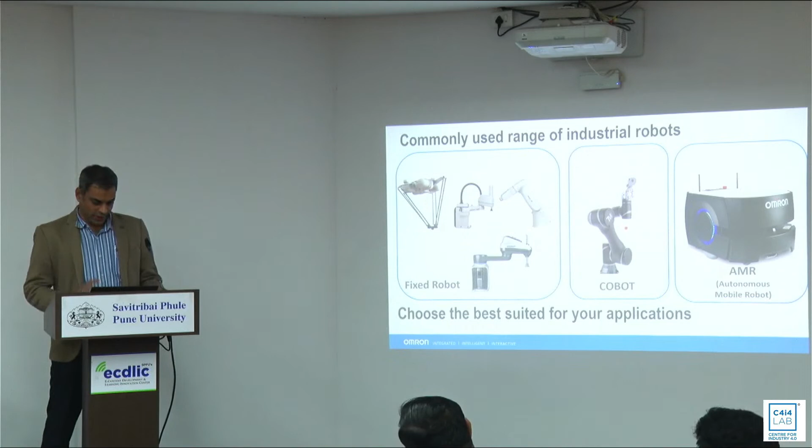Yes, one point is we don't have heavy payload robots. We have robots up to 15 kg, which can meet the customer's demand for high speed, repeatability and accuracy. So you can choose the best suited for the application, and we can deploy according to that. So why do we need robots? As I said, typically to give scalable production, robots can be deployed and the end effectors can be designed and deployed as per the requirement. The versatility of these robots makes them adaptable, by adding the end effector, to a number of applications. So let's look one by one.

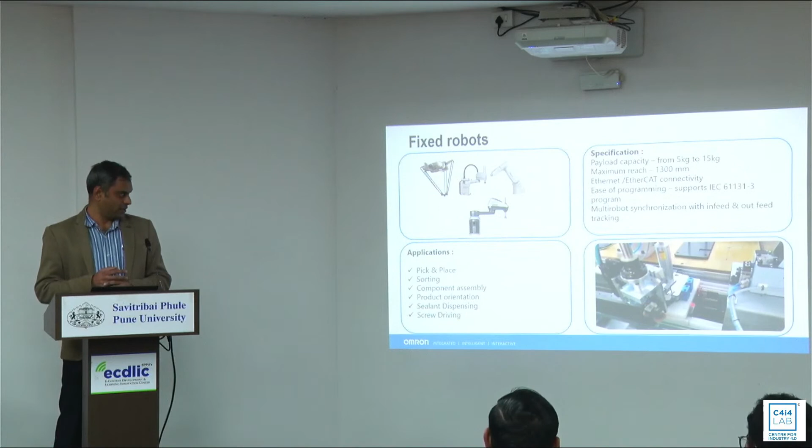Typically, there are some use cases; I also put the applications in this. So, parallel robots and SCARA robots. Typically we have payload capacity up to a maximum of 15 kg, maximum reach of 1300 mm. It can get connected on Ethernet and EtherCAT. It supports IEC 61131 PLCopen programming, and multi-robot synchronization is possible with infeed and outfeed tracking features. This is one application we deployed in one case. It is doing multiple jobs: screw driving, picking and placing, and sealant dispensing. These three types of job are done by a single robot.

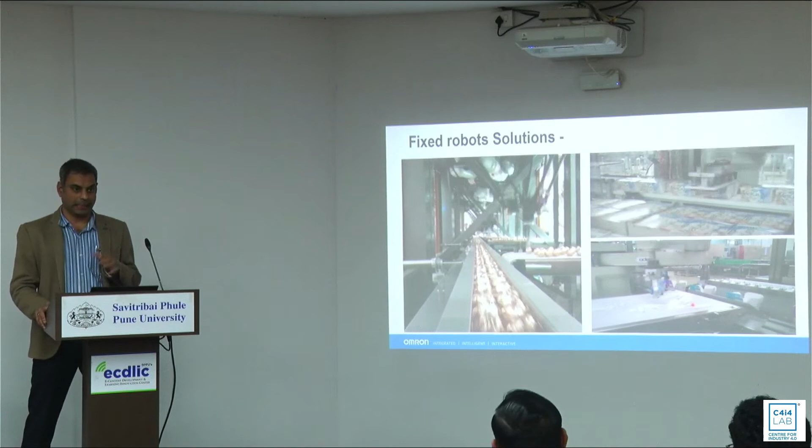So yes, there are other cases, some of the solutions which we have given. On the left side is a high-speed pick and place, typically used in primary and secondary high-speed lines, where the speed goes to 150 or 300 picks per minute, depending on the architecture. This is a chocolate cookies pick and place. It is picking the chocolates from the input and placing them onto the trays as per the requirement.

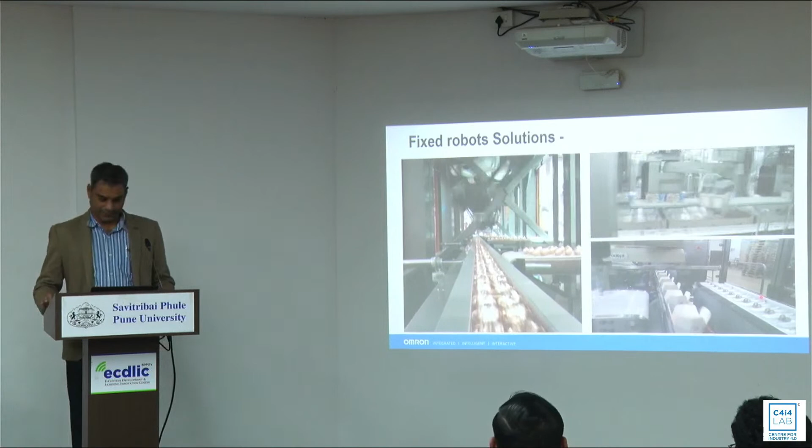The second is the SCARA robot, which typically operates in the range of 40 to 50 cycles per minute, and the concept can be deployed as per the application requirement. And this is a plastic spoon pick and place, picking and placing into the cartons. So these are about fixed robots.

Next is the cobots. So cobots, yes, we do have them, starting from 5 kg to 20 kg maximum with a reach of 1300 mm. It has EtherNet/IP and PROFINET connectivity. And it has 17 safety features, which conform to ISO 10218, and it can be deployed in the system alongside humans as a human collaborator.

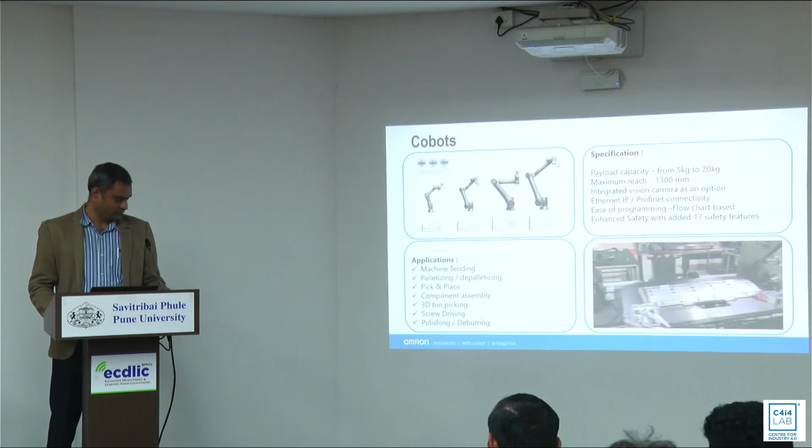Same screwing application with the help of cobot. So some of the solutions which we deployed with the cobots: here on the left hand side is a palletizing application, so to pick the box and pallet as per the required format.

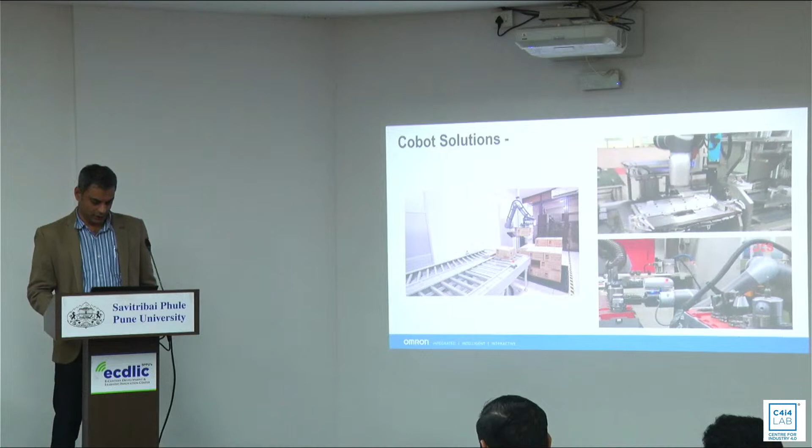And this one is machine tending. The cobot can also get deployed into machine tending solutions, where you can use it for putting the job into the machines and go for the particular task. And one advantage with Omron is we have got an integrated camera. As you can see here, this is an integrated camera. This has got a 3D kind of integration.

So if you are having any object on an incline, a 15 or 20 degree kind of incline, it also performs the task based on the inclination, and it can be deployed onto the particular solutions. So that is the USP which we have with our cobots that can be used.

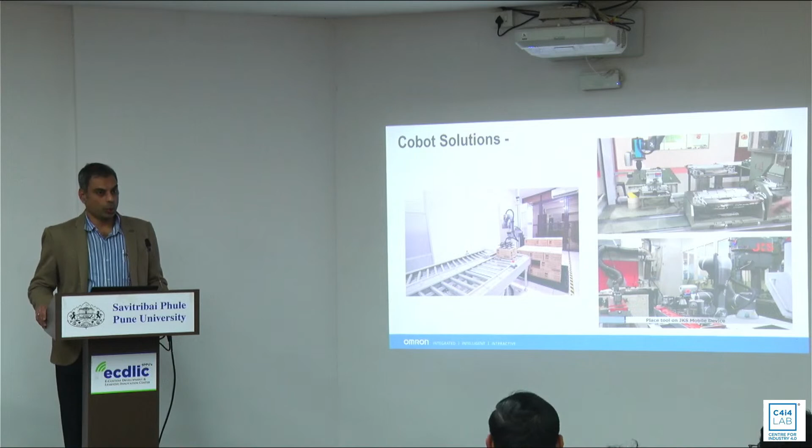And another area, you might have seen in the video: if customers are not using the cobots for 24 hours, and he's using 8 hours in one area, in a second area he can transfer the same solution and deploy the same cobot by changing the recipe. So with this kind of solution we can get the full efficiency of the product and deploy it in 2 areas based on the requirement.

Next one is the autonomous mobile robot. So this is the autonomous AMR. It goes up to a maximum of 1500 kg, and maximum speed is up to 1.8 meters per second, and it has got 360-degree safety to check and understand the obstacles. It has got audio and visual warnings, and it has got obstacle avoidance.

And again, one USP which we have is we can deploy a maximum of 100 mobile robots in one shop floor. So one controller can manage the fleets, one controller can deploy the priority task based on the fleet management, and the task can be performed with the particular robot. And it has got an opportunistic charging feature. Whenever it has time, it goes and docks itself to charge the battery. So this is about the autonomous mobile robot.

So basically the autonomous mobile robot doesn't need magnetic tape or beacons. It has got free natural navigation features, and you can redeploy the same robot for the environment by teaching the robot on the shop floor. So there are two ways: either you can give it the CAD file, or you can teach it by moving the robot on the shop floor.

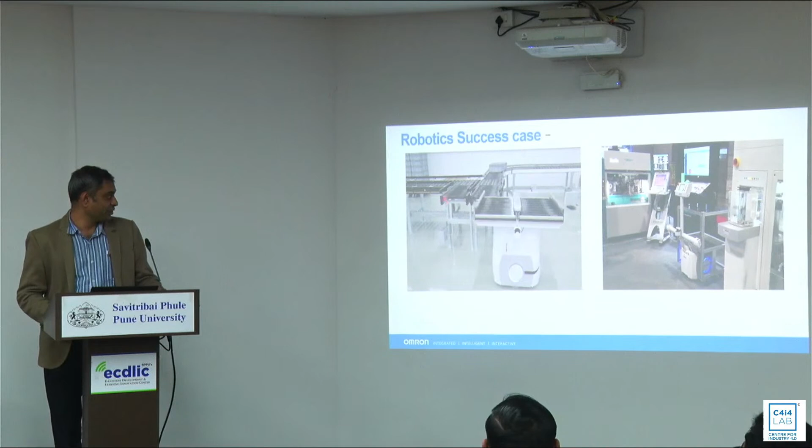Some solutions which we have given with this mobile robot. So this is material management, line side material transfer. We can synchronize with the conveyor, and it can go and deliver the particular required material to the lines. This is one area which we can automate through mobile robots.

And there is another solution, a mobile manipulator solution. So if you see, on the mobile robot we can put a cobot. Putting together the mobile robot and cobot, we can form a mobile manipulator, and it can be used for the particular pick and place task. And it can transfer the material by picking and going to another location to deliver the material. So this is the mobile manipulator solution.

So as we see challenges, there is another challenge in the industry: de-risking of the supply chains. So how are we going to de-risk that? Let us look at that. We have got another solution for this, track and trace. Track and trace is definitely going to help us de-risk from rejections and recalls in the line. So in that we have got a solution we call the MVRC solution: mark, verify, read and communication.

This solution is typically used to get the data from the shop floor and give it to the cloud for further analysis or traceability. So we have a laser marker. Basically we can take the laser marker and mark on the object. The object can be plastic or glass. We can mark it. Then there is a verifier.

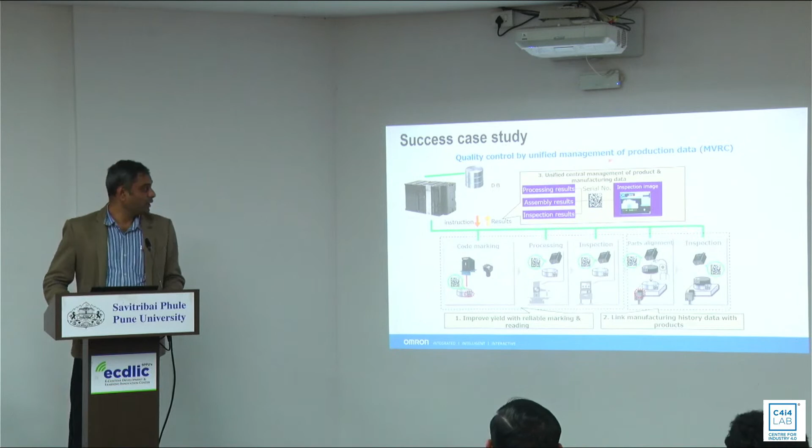Just look at the use case, actually the success case, what we are talking about here. So definitely there is an improved yield with reliable marking with the laser marker. Then link manufacturing history and data can be taken to the camera, then code reader, and the same can be processed along with the image, like assembly results, inspection results, processing results. All can be processed to the database together.

So there is a timestamp output, so we can get the timestamp details, and the image captured by the camera at that time is stored into the cloud. And later on we can pull it up when any recalls or rejection happens. We can pull the data from the cloud in the future.